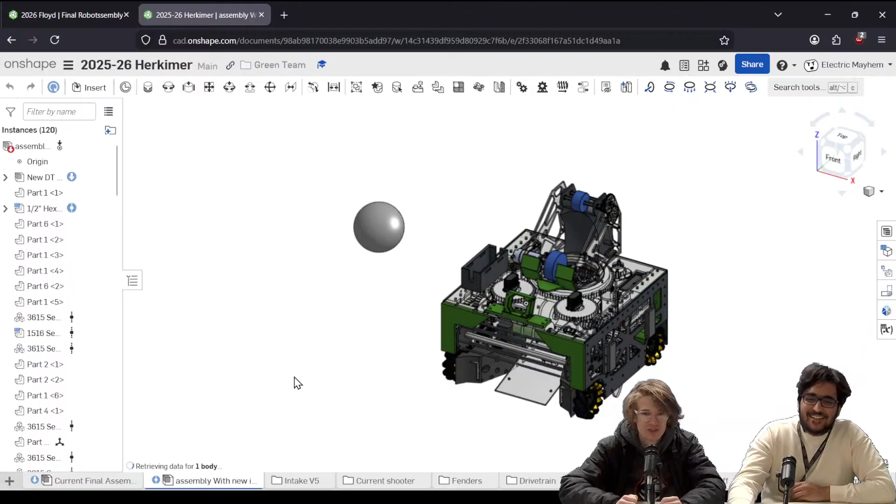So yes, new robot. It's pretty similar to the old robot, but the intake is like twice as wide now, so we can pick up twice as many balls. It's pretty rad, it's like the whole robot now. It's great, it's a 4x3, it's widescreen, yes, it's a widescreen intake.

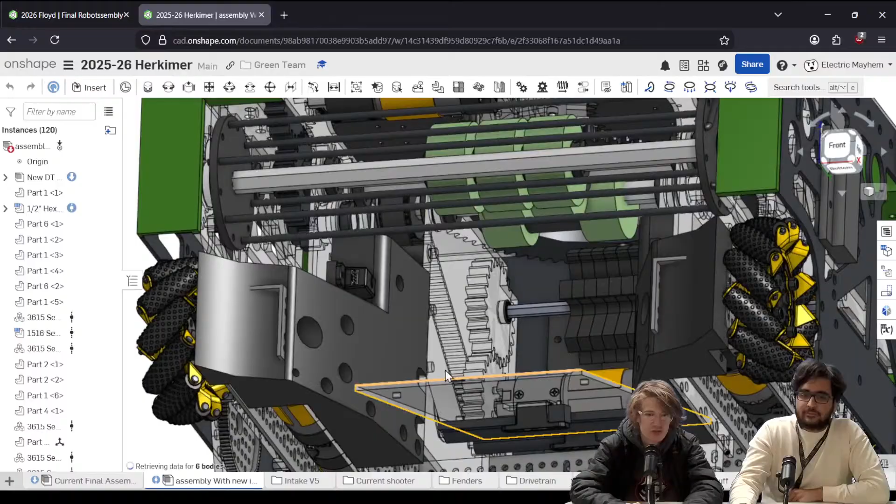The tube is gone, it was too slow. So now we have some boot wheels in the back kicking it up and some green compliant wheels up on top. Two color sensors tell us where we're at. Let's slice it in half real quick. The outside of the robot is straight up aluminum, for those who like to say aluminum wrong.

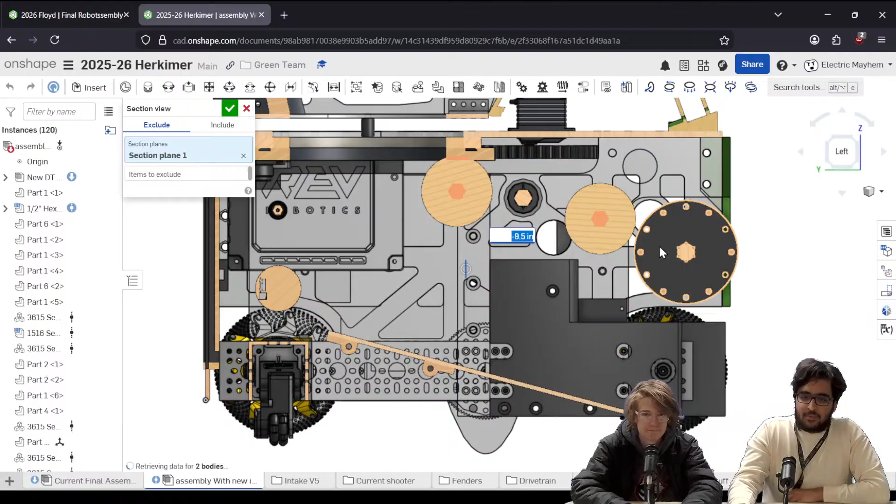So this is the path: it's this big intake wheel, which is rubber bands, goes into the classic rubber band intake, and then there's two sets of regular roller wheels, and then some boot wheels. There are... you gotta grab the arrow, move it. Yeah, these boot wheels right here.

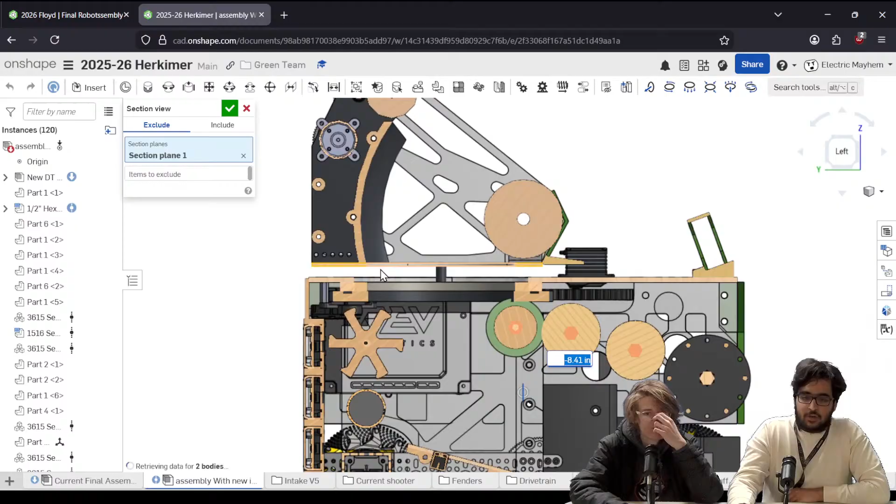So at Penfield we had that issue of the dead zone between the turret and the stuff. We completely redesigned everything and it's gone now. It's really good. The turret now has two actively driven wheels, back and front, instead of a passive back wheel. And there's no more hood.

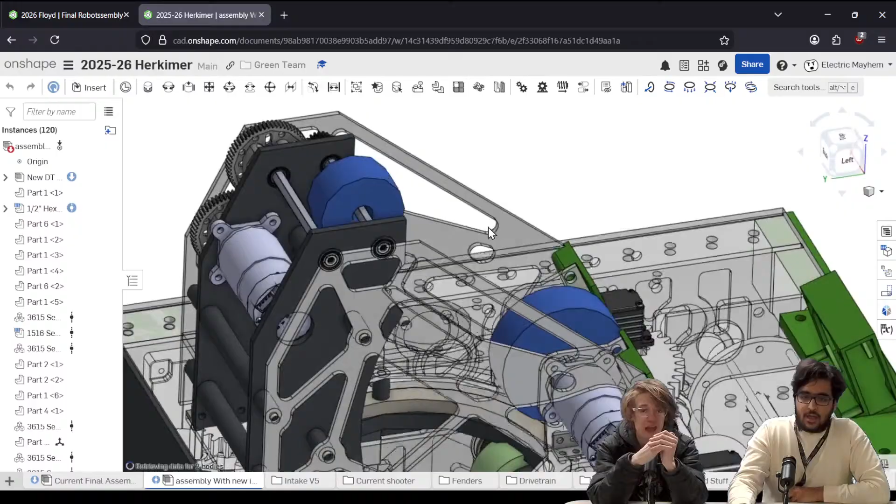This is a fixed angle, but because you have two speed controls, it's all right, you can drive them independently. And the side plates on the side, they're not actually used for anything, they're just snazzy.

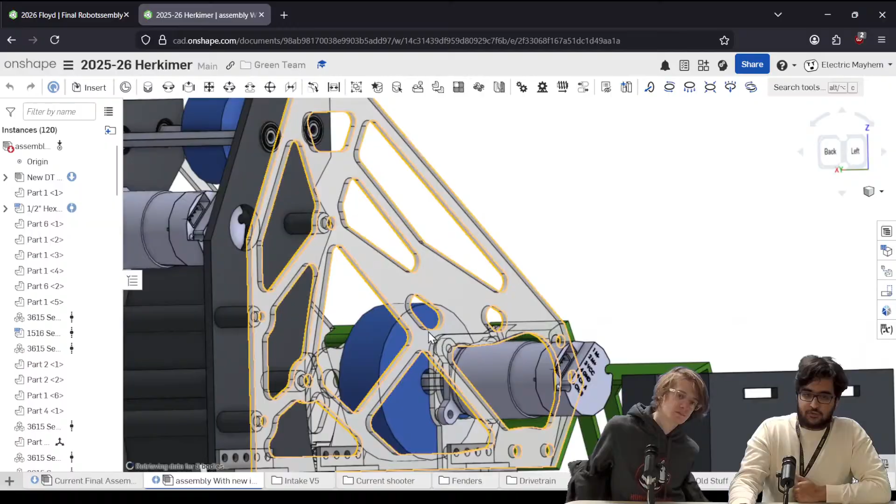We had a change between Albany and Corning, which had to do with this two-wheel system. Before, there was a space here where this motor was. The motor is now directly attached to the wheel. It used to be belted, and the belt caused a whole bunch of friction and a whole bunch of bad, but now this is really good, it spins for like 10 seconds. Direct drive your motors, yeah, when they've got flywheels on them, direct drive them.

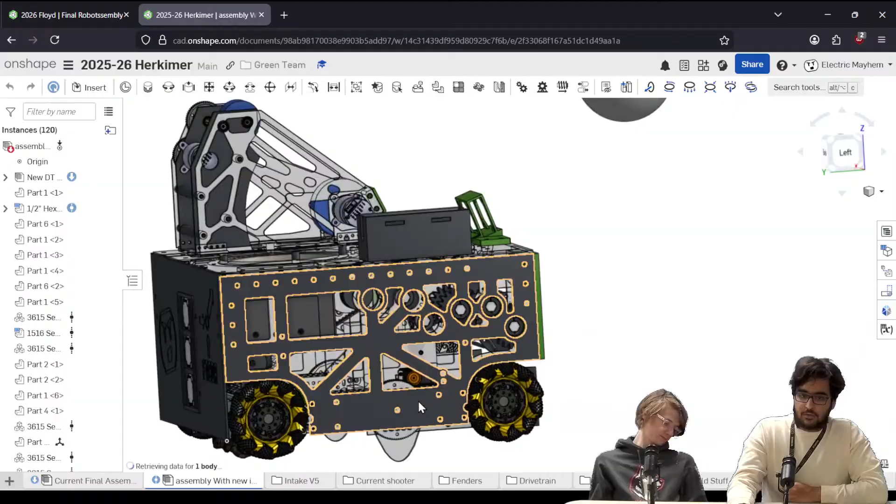It's pretty rad, with this very cool engraving on there. And then this one, which did not actually come out very well, so we just put stickers over it. But this one was pretty cool. Yeah, that actually looks rad.

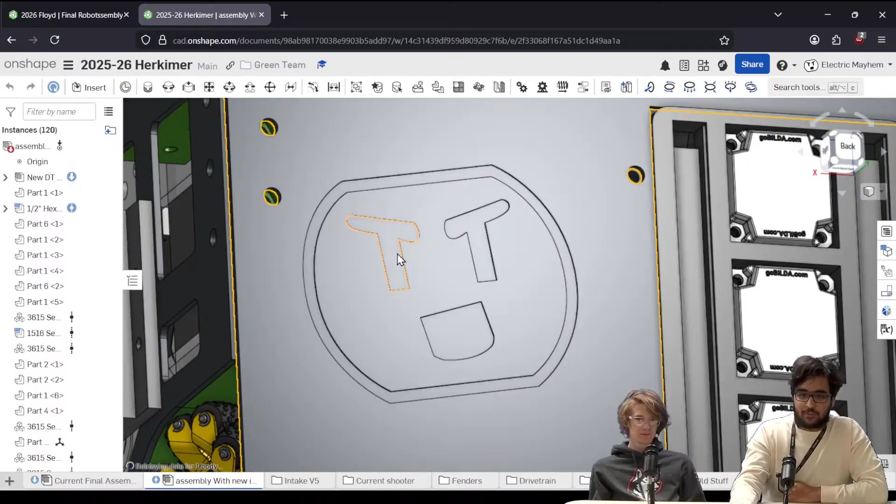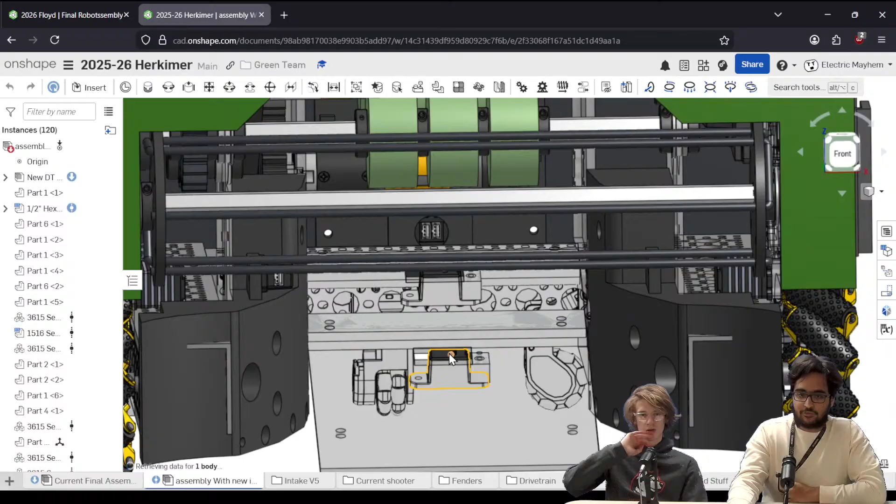And yeah, so these lights are still here, and these color sensors that are in here are going to be used to basically just beam the color from here to here. It's like a magic color tube, it beams it so you can see what colors you have. Yeah, it's a 3-pixel camera, which is not a lot of pixels, but it's enough to tell that there's a purple here, a green here, and a purple here, or whatever you need, which is pretty cool.

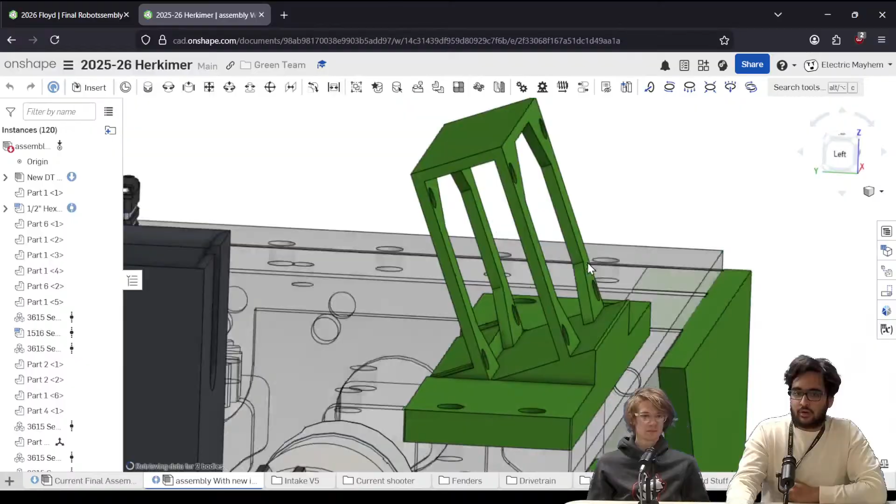And there's a Limelight on here, which we may or may not use for localization. Not critical path, but it'll be cool. Also the gears driving the turret are now inside the robot and also way bigger. Yeah, and we're also probably going to get rid of one of them. Oh, I didn't know that.

Yeah, we're having some issues with the rotatiness of this guy. Basically, if you tell it 'I want you to point straight this way', it's going to go, and then it's just going to kind of stop right there.

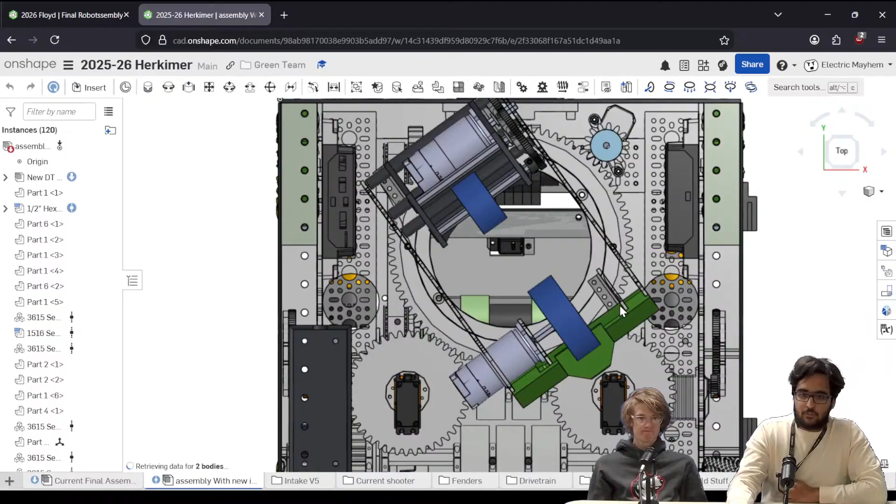No amount of PID tuning is really helping, because it's either oscillating or overshooting, and it's doing a combination of overshooting and steady state error, which isn't supposed to happen. So we're thinking about some mechanical changes to make it easier.

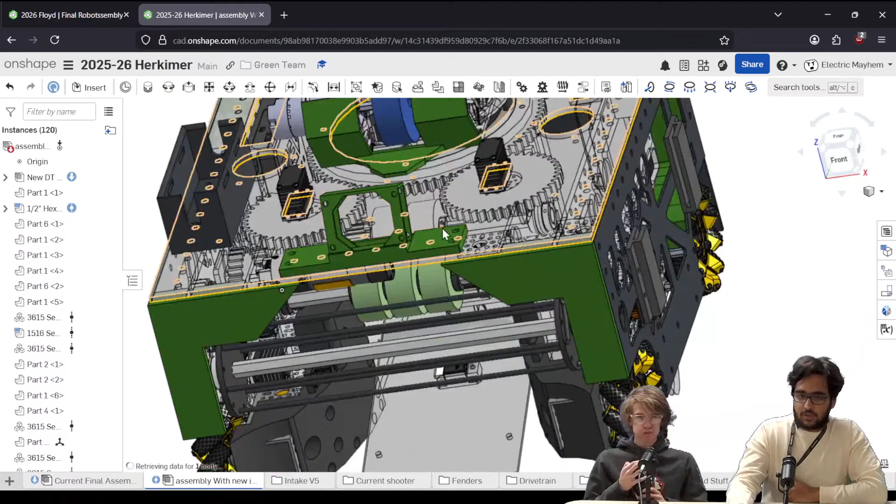One of those changes is getting rid of a motor, because the two motors driving it clash with each other. Maybe we'll see if that works.

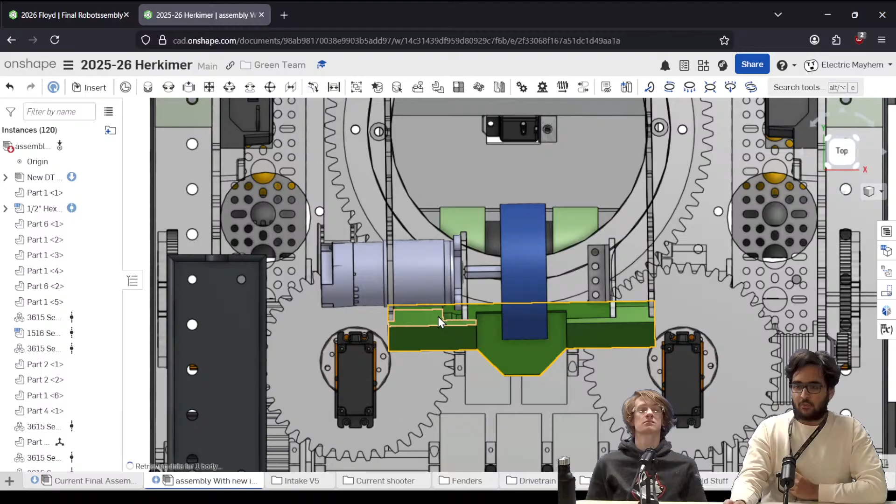The other thing is that we think the motors have a dead band where below a certain power they just shut off. So we're going to take the output of the PID controller and bias it upwards, so that when the PID controller says go, the motors actually go, which is pretty cool. That's the changes that have been done and are going to be done soon.

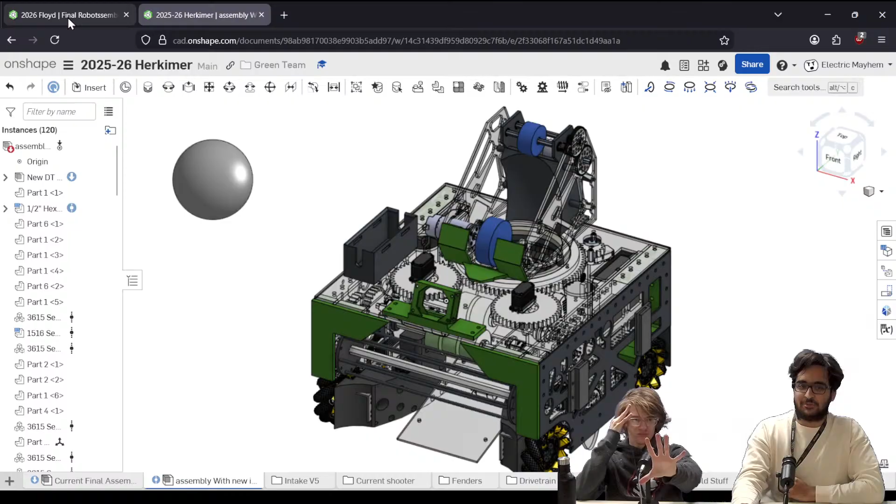Typically in FTC, the last episode was filmed actually before FTC kickoff. Hi, Mr. Block.

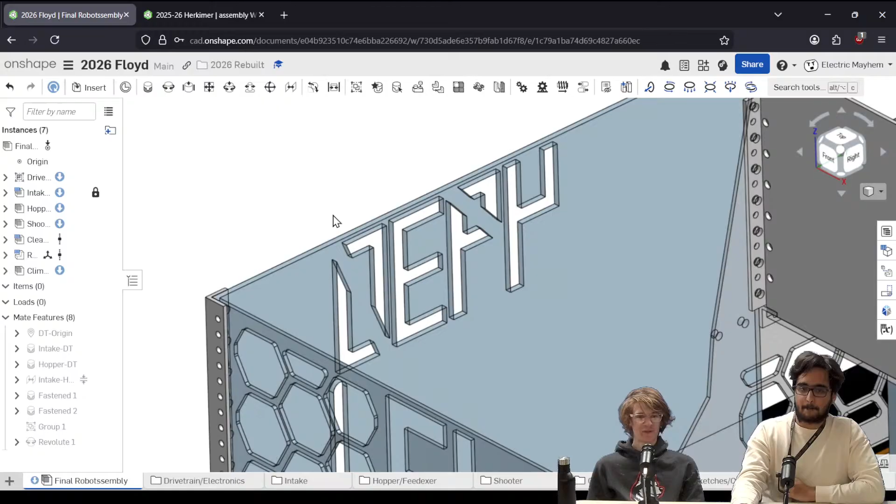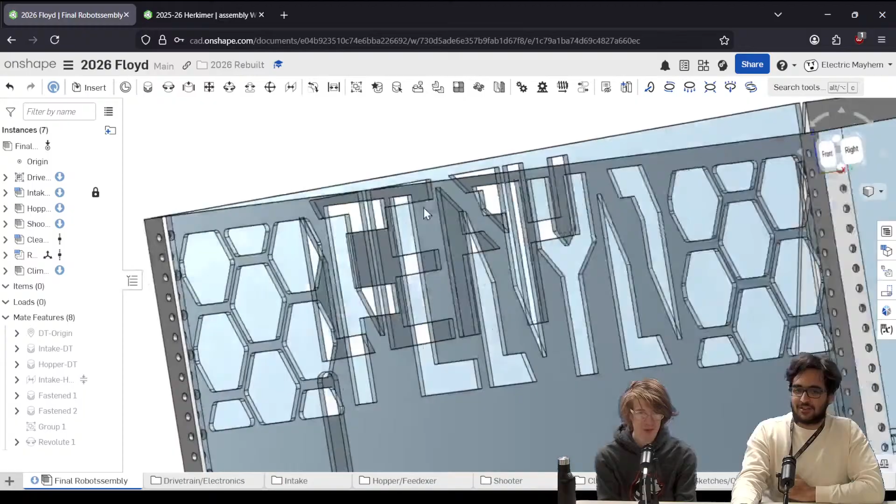So this is Floyd, bringing back the 4930 and robot nameplates from last year. Pretty cool, this robot is pretty rad.

Yeah, it is. I really like talking about the design, I love the hexagons that we put in a whole bunch of places.

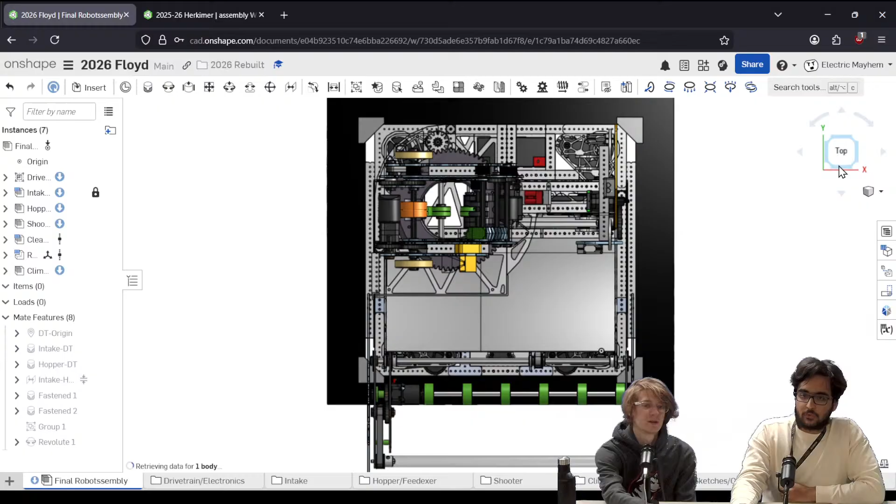Let's start with the drivetrain, usually a good place to start. Drivetrain here, I'll take the mouse. Okay, drivetrain, pretty standard swerve drive, you know it, you love it. We're using the Mark IV-Is on the back, and we're using the Mark IV-Ns on the front.

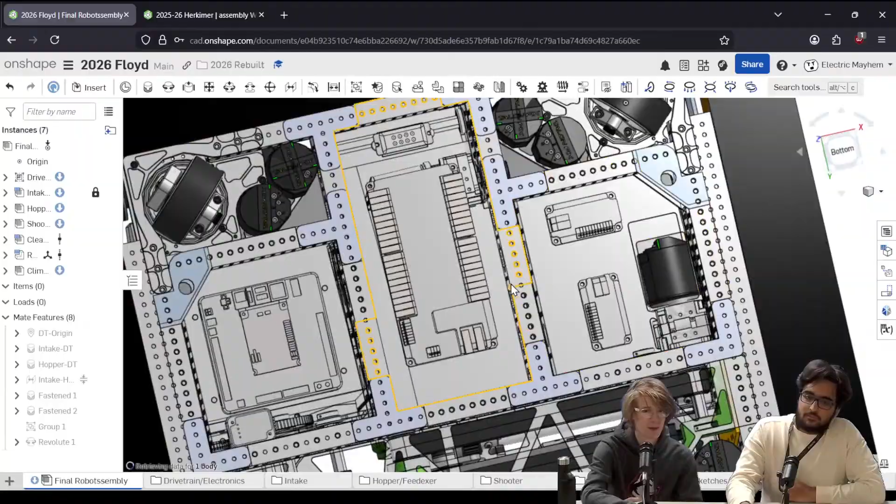Electronics are mounted upside down because that's the only place they would fit, and they're really compressed into this space. Are those polycarb plates to cover up the electronics? Yep, those look pretty cool, they fit between the gussets. Yes, they do, very cool.

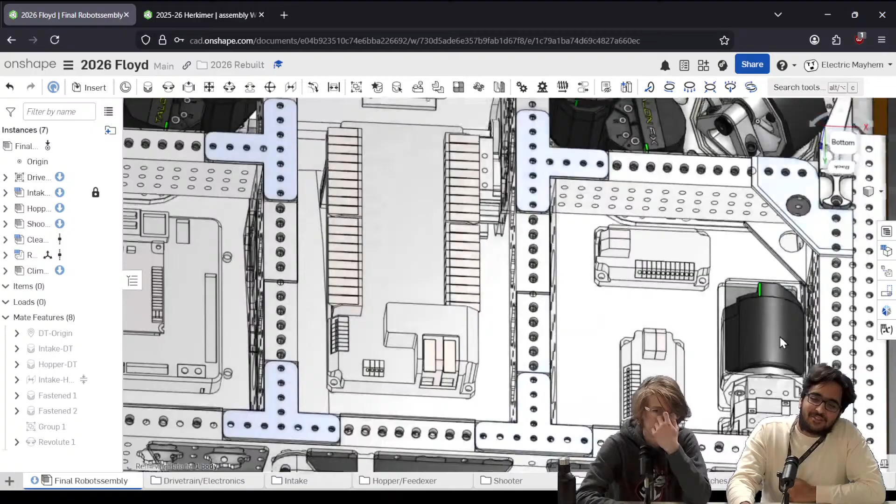Yes, I like that. This motor sticks out a little bit, so we've got to make a little 3D print window to cover the motor. The electrical team is continually threatening, but not yet actually going to behead me and put my head on a pike, because at one point they had the entire bottom of the robot for electronics, and now they have a little less than half of it.

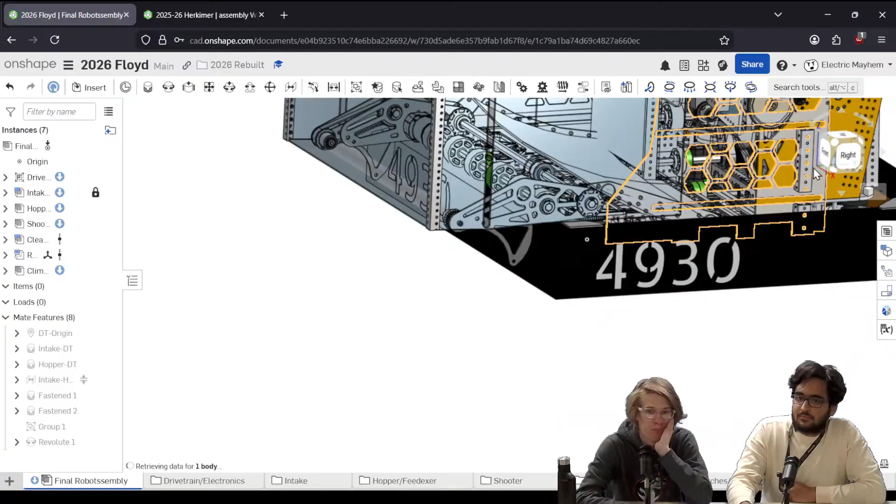But anyway, let's talk ball path. The ball starts with the intake, where all good robots start. We're doing a polycarb roller intake, first time we've ever done it. Loving the polycarb rollers, we're using the 50 durometer ones, very rigid, very stiff, makes the intake very strong.

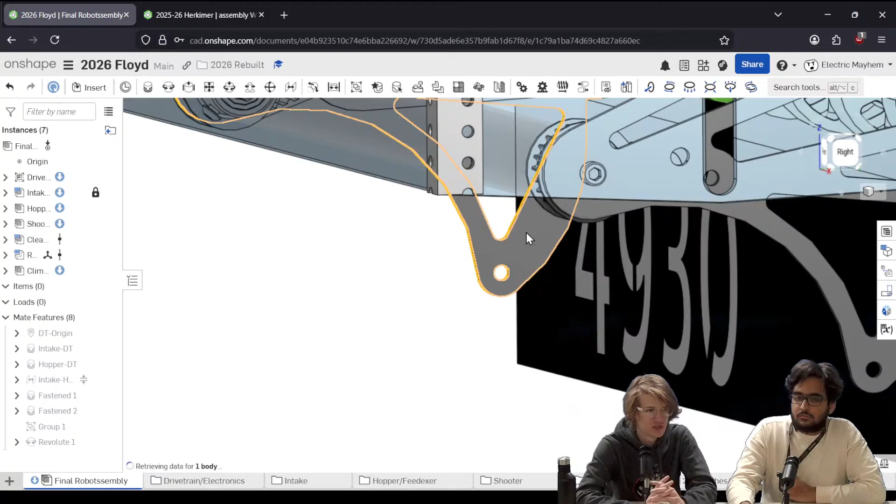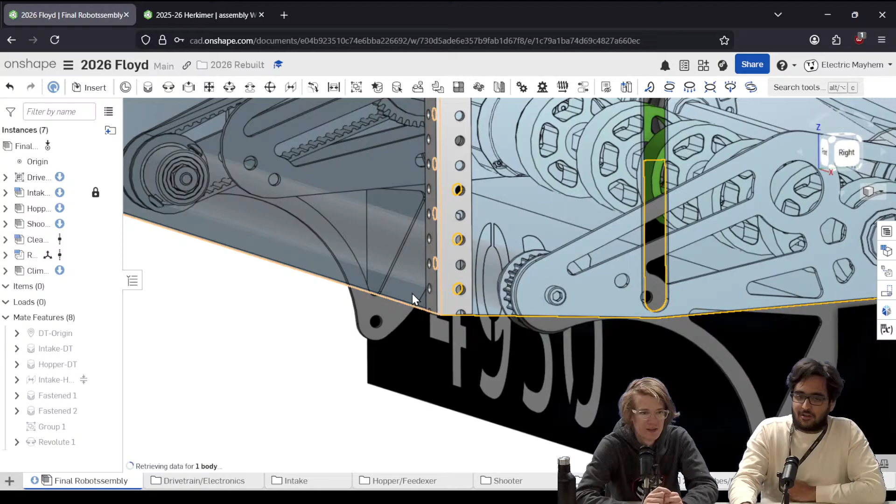And it's got what's called cat tongue tape on it, which is just grip tape. Yeah, it's the tongue of a cat, which I didn't know. I thought he was saying Kapton tape, the stuff you put on electronics, and I thought that's not going to give you any grip because it's film. But cat tongue tape, apparently cat tongue is particularly grippy. I didn't know that.

Aluminum side plating. We're doing something a little bit different. We're getting a little bit quirky.

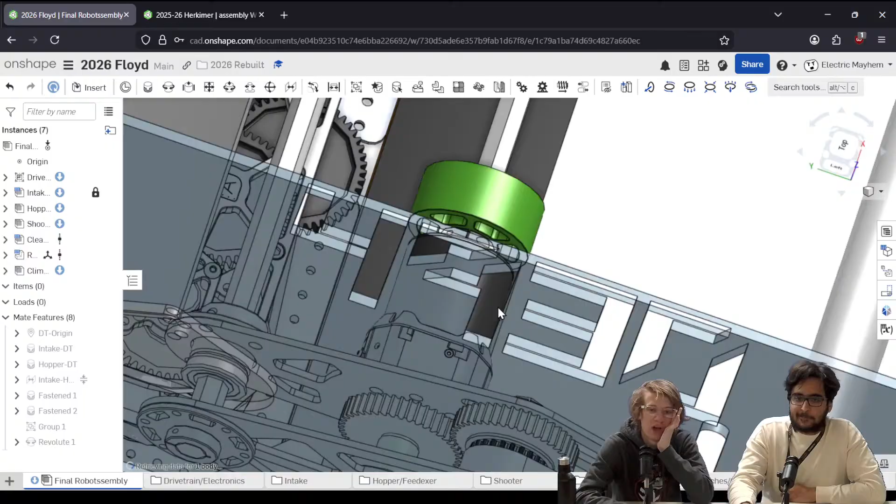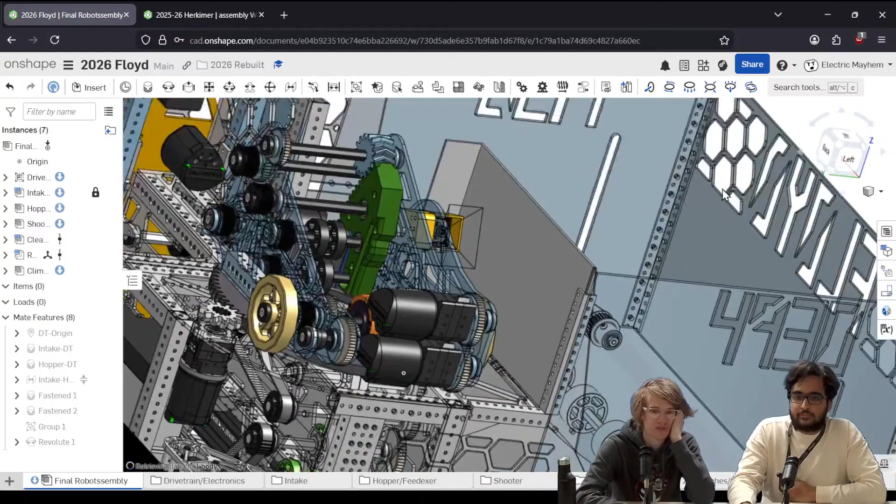The motor, we got a Rev Vortex, Neo Vortex here, driving the intake. This is the roller, and these compliant wheels actually spin opposite directions, so that the ball gets a little bit of upward velocity, so that it's getting on top of the balls already in the system. It's not in CAD, but eventually we're going to put a little slanted polycarb piece across this space to help them go up, but also still vector this way.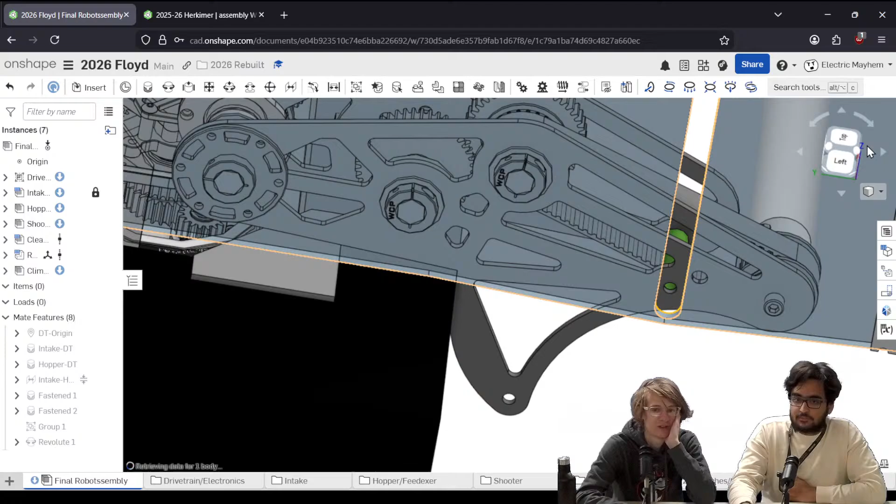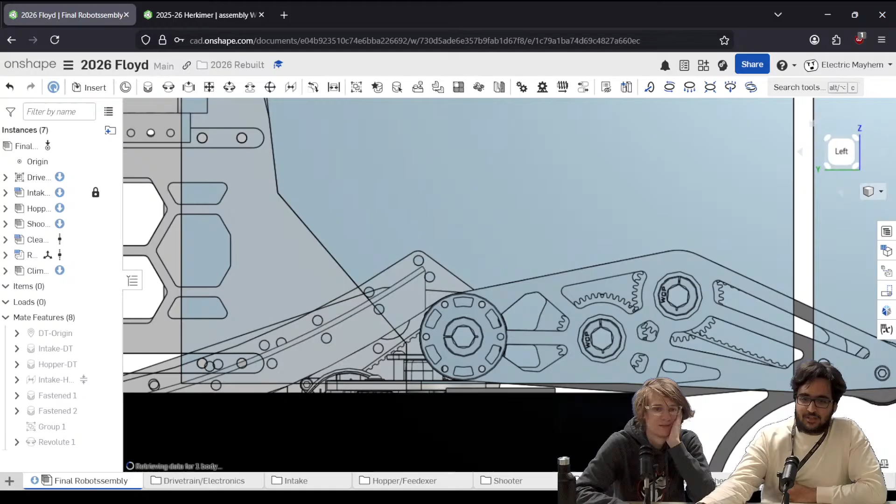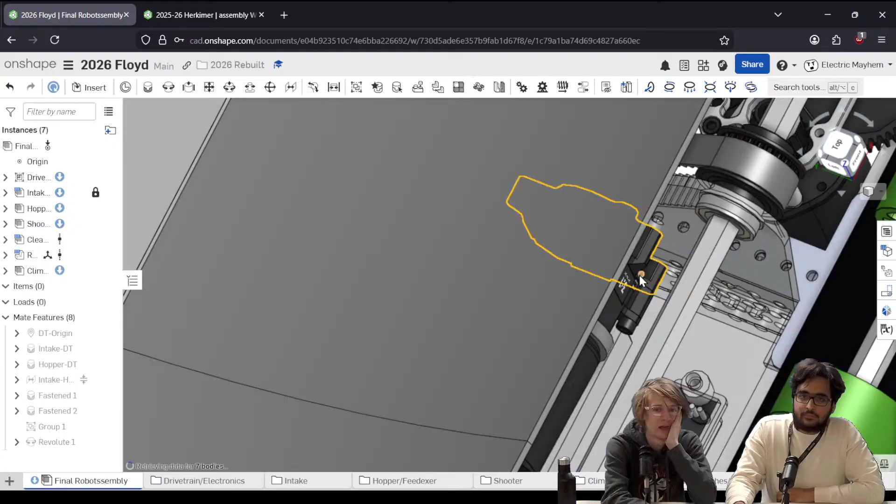Okay, so how it's supposed to work when the CAD is working: the intake pivots around this shaft back here, which is belt driven down to a crank and down there, and the intake moves upwards, rotates inwards like this, which brings the hopper backwards.

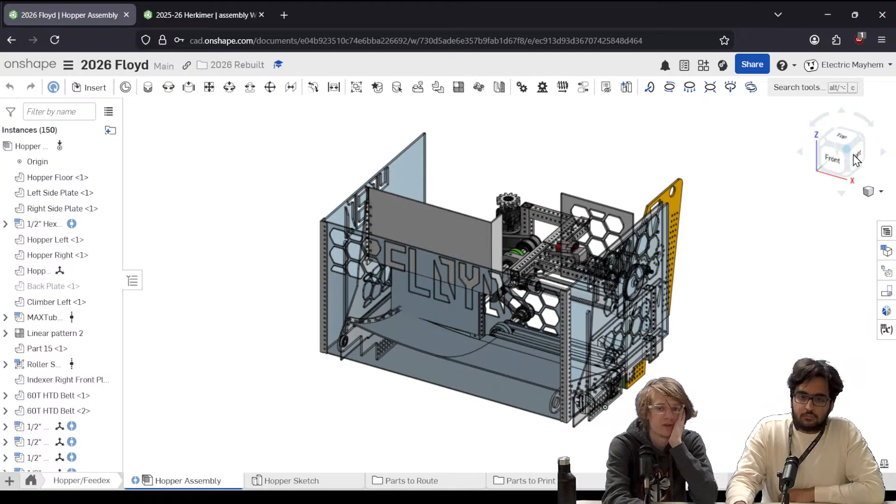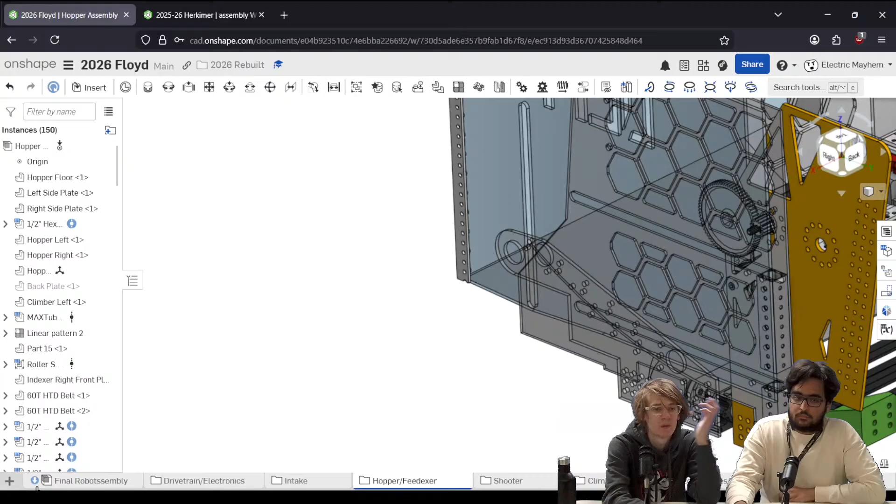I can actually show you the hopper moving in this assembly. So the hopper can extend inwards and outwards. The hopper starts in here. When the intake goes out, the hopper comes out. When the intake goes in, the hopper comes back in, about that far, and we got some slots on this piece, the honeycomb, to give it some path for the hopper to move inwards.

So the intention is to leave the intake out for most of the match to increase our hopper space, and then bring it in, keep it in at starting config, and also bring it in for climbing at the end, but we'll get there. After the balls are intaken, they roll down this little ramp and into the indexer.

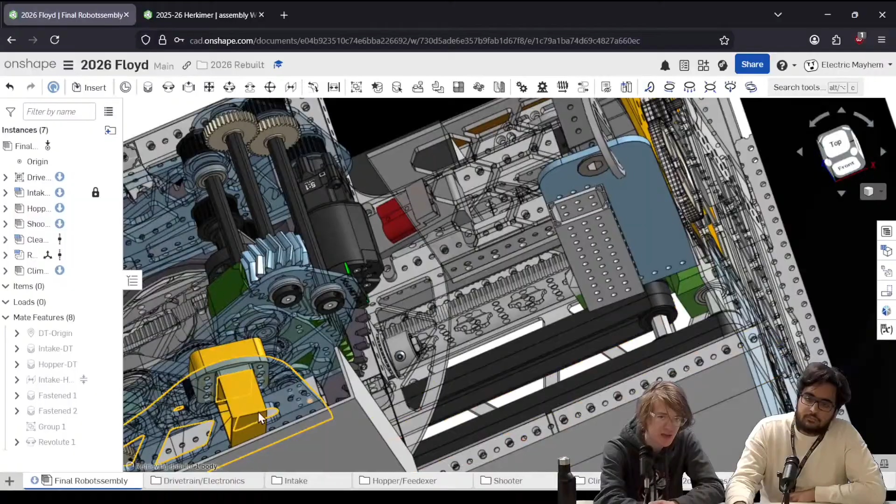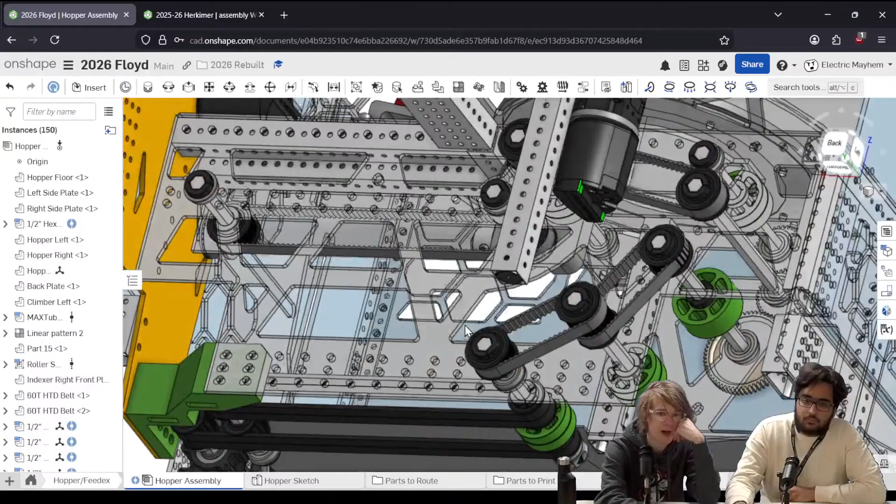So I'm going to open it up in here. That ramp is made out of some very bendy thin polycarb that's been zip tied to the sides, and also there's some polycarb ribs below it that it gets zip tied to. Those roll down into this belt indexer, belts on the bottom, belts on top, which indexes it this way. And then we got a cranberry alarm style, they did a robot in 3 days style, 2-inch compliant wheel that brings it up into the shooter.

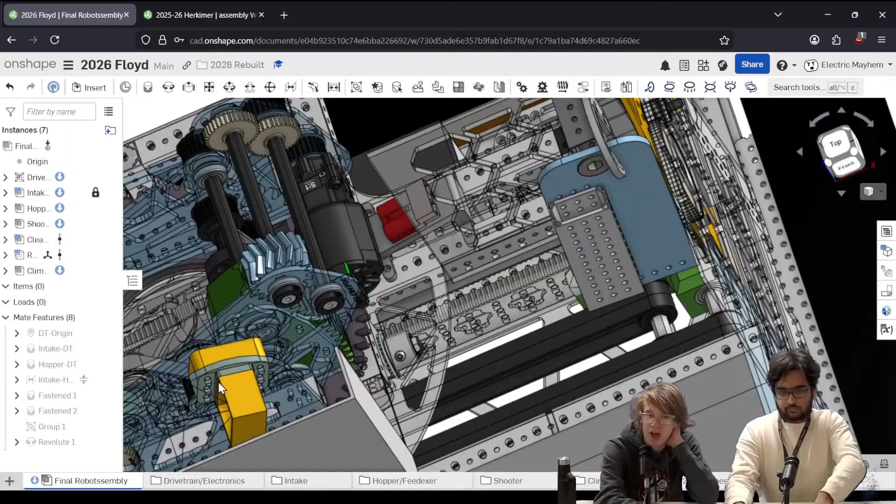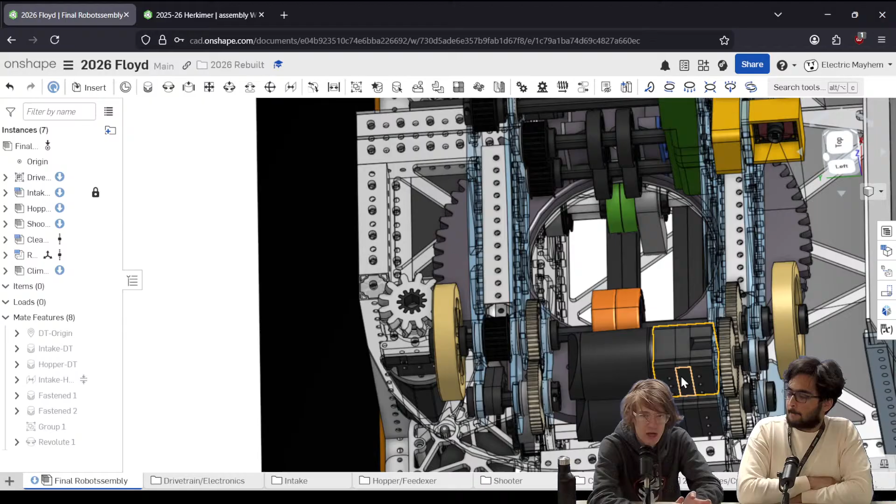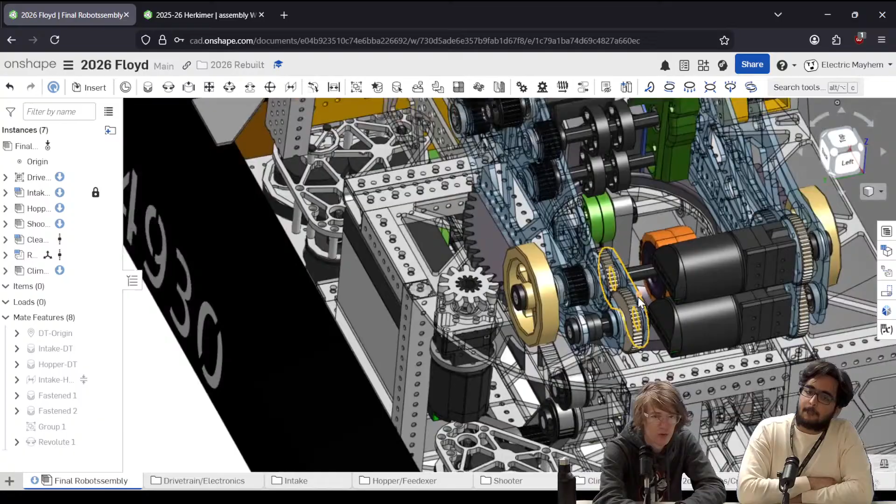The shooter is a 2-motor shooter using some orange BaneBots wheels and 2 SDS flywheels. The whole mechanism is on a turret. We found some what I believe are record player bearings in our lab, so we decided to use those for our turret. So we have 2 motors driving that, and then we got a rack and pinion redirector on the back, driven by a 3rd motor. And then there's also some driven black WCP compliant wheels on that, and then the whole thing is spun down here by this turreting motor.

So that's the shooter. This seems to be...

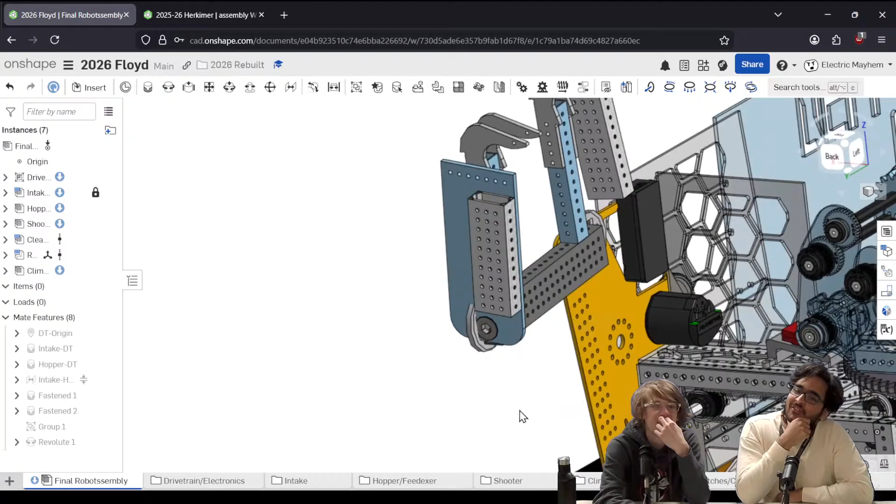Oh okay, so this is allegedly the climber, but it seems to have a bit of a CAD issue, so just imagine this. So these hooks... No, that's how he wants to do the climb. That's how, yeah. That is, wow, wow, I don't know how I'm going to explain this with that CAD. All right, we'll get... transition. Okay.

I'm going to explain the climber using a step stool. All right? So you got your bar up here, right? Uh-huh. And you got 2 hooks down here that fold. Give me your arm, that fold up like this. I'm just trying to remember what it looks like.

Josh made the climb, but basically 2 hooks, we're doing the Robonauts climb, so 2 hooks come up. Oh Josh, this is the bug. Use your hands to act as the climber. So yes, 2 hooks come up under the bar, and then the whole robot pivots up to an L1 climb. That's a really good representation of what it's going to look like the first time we try it. No, yes, that won't happen.

So yes, in summary, a robot can drive, fit under the trench. Yep, so it's short, we gotta fit under the trench. It can intake, store probably about 40 to 50 balls.

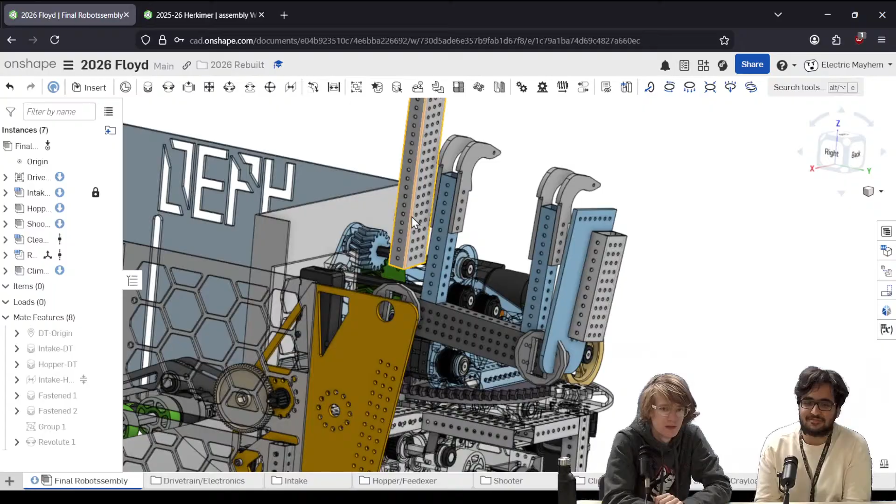The robot, there's a significant part of the... presents. I'm going to let Hamid look at this while parts of the robot that are currently built: drivetrain built, electronics on, intake on.

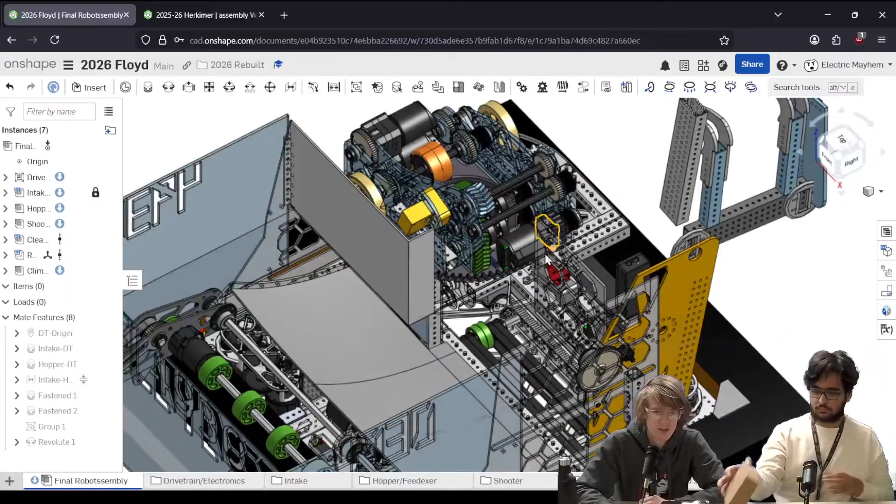Indexer back here on, shooter on top, these two top plates built, but they are not yet attached.

And so what we need to build is the climber and the hopper extension. So that is an entire January's and most of a February's worth of FRC progress summed up in probably about 10 minutes. Hamid, what did you just get?

I got a USB 3.0 7-port hub, a portable monitor, like 4 audio cables, which is actually too many, I think, but you know what, we'll use them for other stuff.

Got NEMA to IEC power connectors. Oh, I know what this is. Yes, power strip.

2 Arducam 5 megapixel wide angle cameras.

Well, just to explain what we're doing, wait, there's one more, and there's the Dell Optiplex 90-watt power adapter. That is the haul, that is Hamid and I's grocery haul for a senior project.

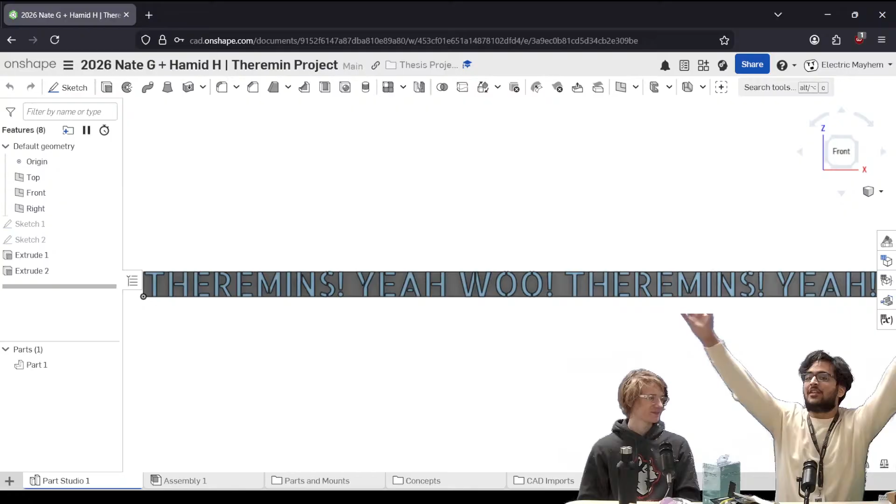Yes, so this is a theremin, but we're not doing a boring theremin made out of capacitors and electricity. No, we're getting funky, we're doing hand tracking with the Arducams, computer vision, and Dell laptops.

And the funniest thing about the senior project is that, at least for the software component of it, it took a couple hours to make. So the reason we're doing the hand tracking is because if you do hand tracking, you can do fun stuff.

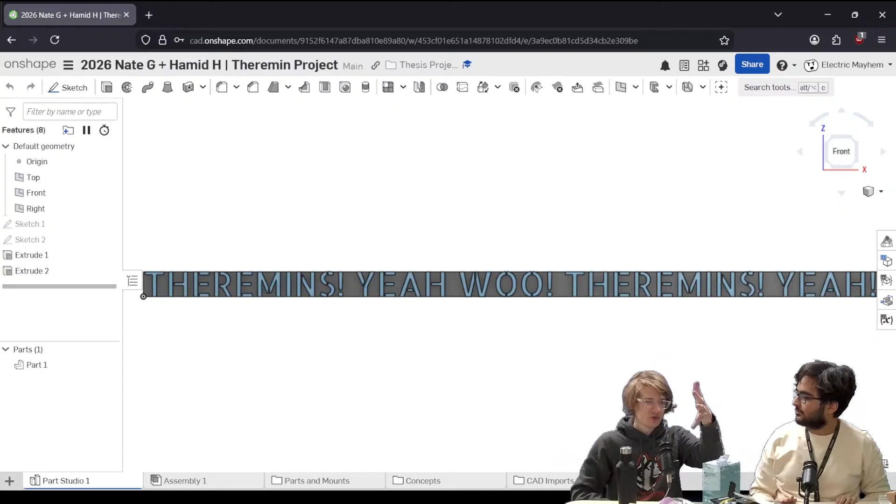So you can do distance from the camera for pitch and volume. But then since you're tracking your hands, you can also do some rotation, you can do some grasping, and you can do computer tracking of individual fingers. I could assign my fingers to fader channels in FL Studio.

It's crazy, and you can do fun stuff like, I can change my notes over here and I can change my volume over here, but if I rotate my hand like this, I can add reverb to my synth. And if I do this, filter LFO, all of the different things. You can just hook up anything to it.

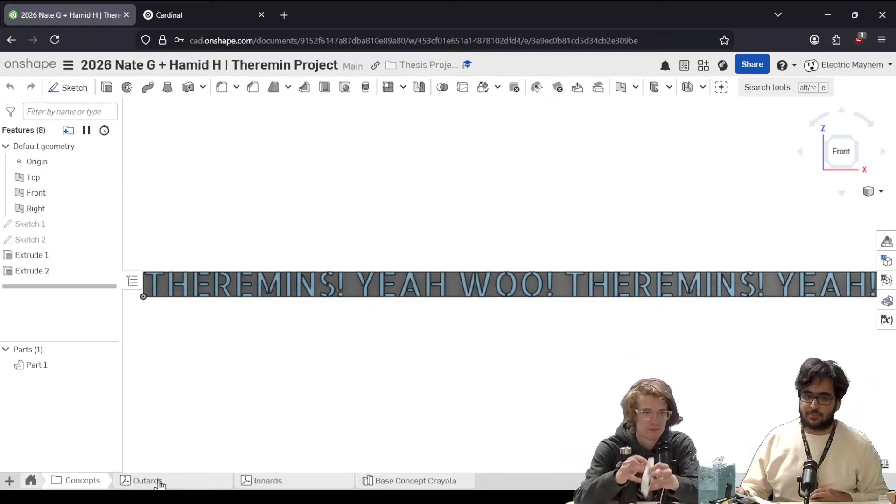Right now we have a whole bunch of parts, but we also have some concepts of what we want it to be. This is my drawings, my great technical drawings of what I'm thinking of.

It's going to be this big box with a little tower coming out of it, with the camera on. One camera's going to be on the tower, one's going to be on the base. So you put your hand here, you put your hand here, and then there's going to be an audio interface at the back of it, and you're going to have a screen at the front of it so that you can touch it and plug stuff into your synthesizer and whatnot.

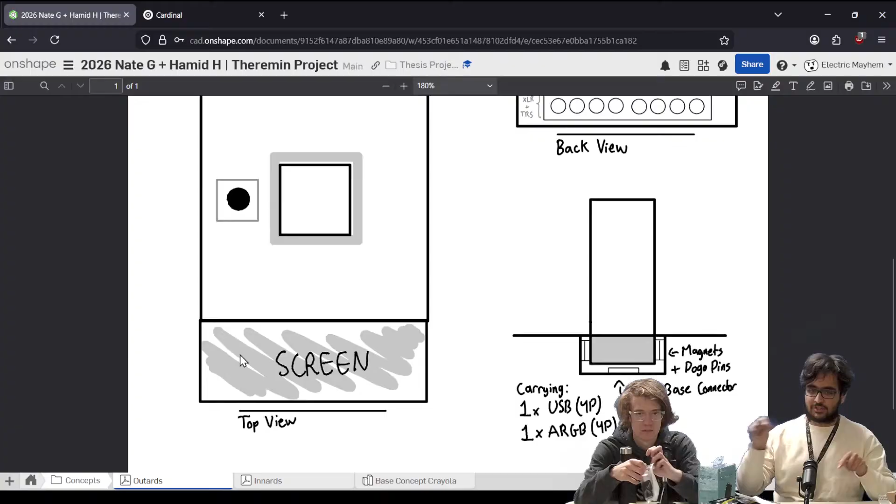And it's going to use all of these components. I made a little diagram, which is pretty cool.

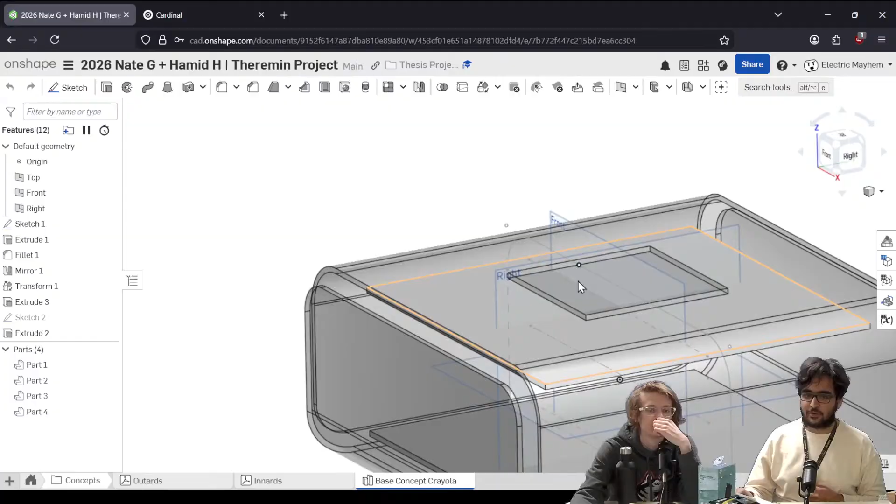And then we made this - well, I made this pretty recently. This is like a little concept of what I think that we might do for the manufacturing of it. Still up in the air whether or not we're going to go this route, but I think it would be not easy to manufacture something like that, but I think it would be pretty rad. Well, SendCutSend can do it, and that would be fun.

I'm sure they can. And then there's a whole bunch of this stuff that we still have to do. This is all the parts, and we have to make mounts for all of them so we can make our electronics plate. This is a mount that I made just today.

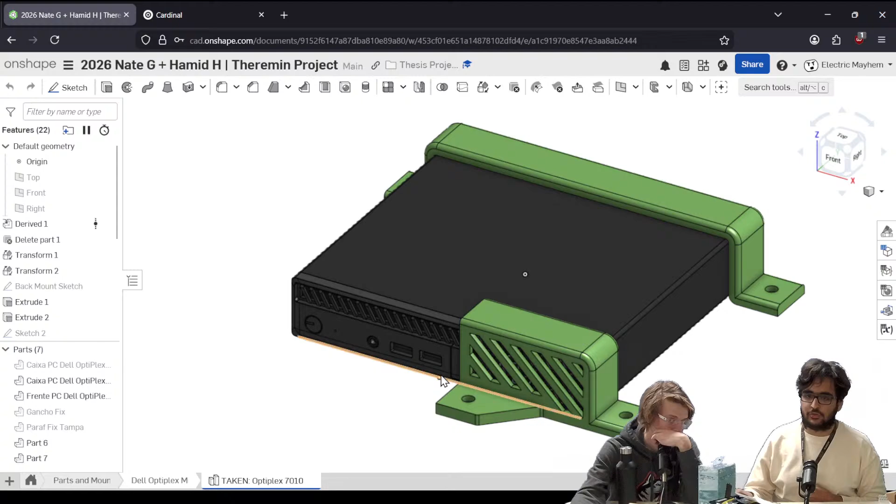So that's the computer - that's the brain of the machine, and then there's the interface, which we will have to swap out because it's sold out like everywhere, which kind of sucks. Behringer, yes - so we're using a different interface. This is not the interface that we're going to use, but if we did, that's the mount for it.

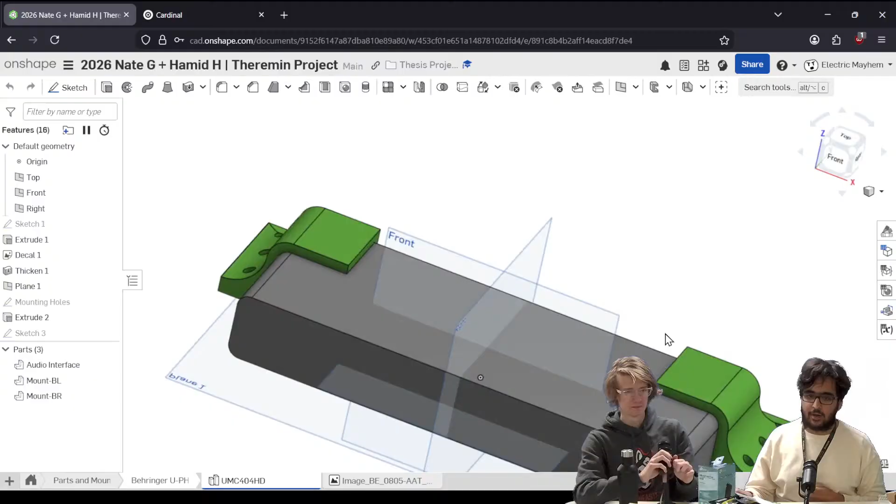So all of this stuff will eventually turn into a pretty cool theremin. Yeah, and it'll have lights in it, by the way. It's an RGB theremin, gaming theremin. We'll put like the RGB gaming theremin, put the ROG and Razer logos on it. It'll be awesome.